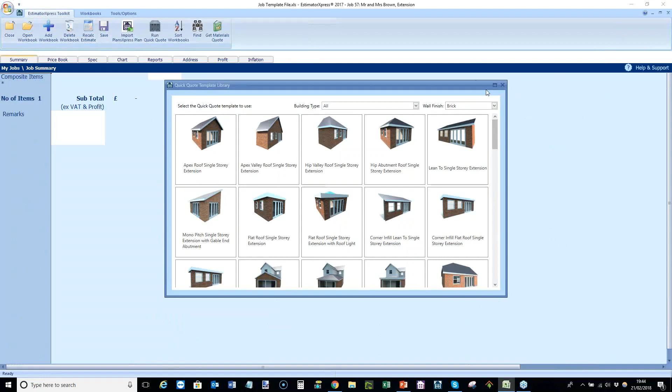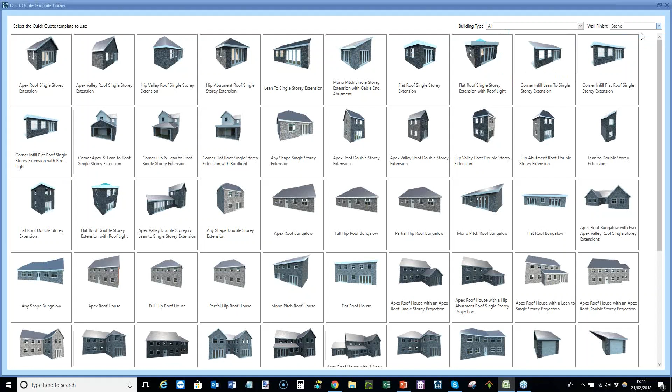Here we are in the template picker, and I'll expand this to fill the whole screen so you get an idea of how many different specs, types of extension and house there are. You can do it in render, you can do it in stone, literally hundreds of different extension types you can go for. I'm going to go back to a traditional brick and block extension, and we'll do something fairly straightforward - an apex double story extension. I could just as easily do any of the others; they all function in the same way.

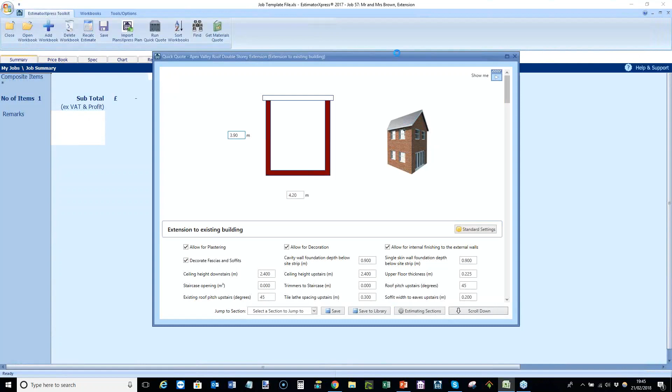Okay, so the software says, you've said you want to do a brick and block extension, I'm happy with that. These are all the things the software will automatically take account of and display on the screen if I so wish. I'm going to say yes, leave all those ticked, but if you want to, you could leave some out so you don't overwhelm yourself with information. Click OK, and the software creates the template ready for me to start inputting information.

So let's assume, for argument's sake, that my extension is projecting 4.2 meters, and let's assume that it's also 4.2 meters, so I'll leave that. It doesn't matter, I can change it to whatever value I like. I can confirm that I'm plastering, decorating, allowing for internal finishes to the wall where the extension adjoins the house. I want to finish that. I'm not going to decorate the fascias because I know by default I've got plastic fascias.

I can set my foundation depths, my ceiling heights, my floor thicknesses. If I was doing a house, I might have a staircase and trimmers. I can set the pitch of my roof, the pitch of the existing roof, and the pitch of my lath and my soffit width.

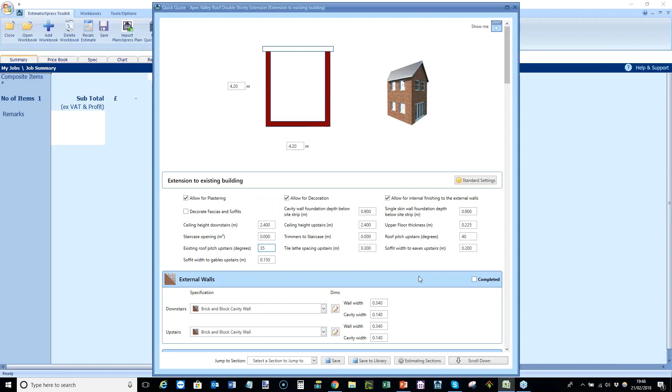So the system now knows all about the geometry. If I said to the system, prepare me an estimate now, what it would do is do the complete brick shell, slabs, upper floor and tile, but without any doors and windows, with a brick and block specification. Now clearly we're going to want to do doors and windows, so I'm going to show you how you do that. Incidentally, at this stage, even though I've initially said I want to do a brick and block, I could change the specification of the upstairs and downstairs walls to render or structurally insulated panels, ICF, and so on.

I can have a concrete ground bearing slab, or I could change that. So say I wanted to change that to a beam and block floor with a screed, pick that, and the system will automatically do that for me. I'm going to go for an uninsulated timber floor. I could change it if I wanted to.

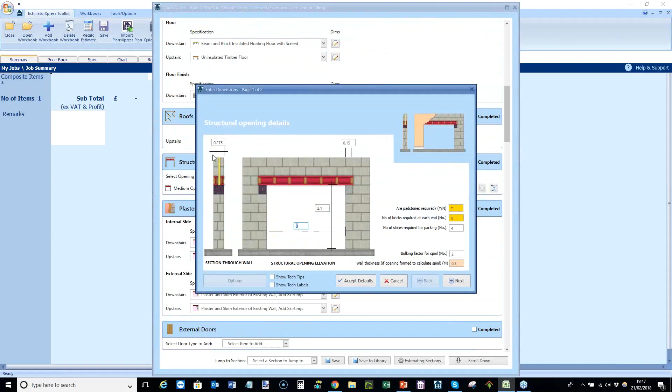I'm going to do a cut roof. I'm going to plaster and insulate the ceiling, and I'm going to have a structural opening upstairs and downstairs in this example. So I've got openings to existing walls, and I'm going to do a couple of openings that are 3 meters wide, set that to 3, set the height into the thickness of the walls, the end bearing, whether I want pad stones or bricks. I'm going to use pad stones, spoil bulking factor, whether I want to plaster the reveals and so on.

Click finish, and the software has automatically calculated that once I put in that I want one downstairs and one upstairs. If I wanted to, of course, I could have a structural opening downstairs and an internal door upstairs from the bedroom or whatever. It's entirely up to you.

The system will then allow me to automatically plaster the existing walls, and if you want, it will allow you to plaster the inside of the house and so on, because you may well be disturbing that when you bang a big hole in it. Obviously the software is going to take account of the structural opening in the wall.

I'm then going to add a patio door. Now I could use the crystal doors. There's several thousand doors to pick from there, but for speed I'm going to pick a bifold door from a standard range. So let's pick say a 3 meter bifold door for downstairs, and I want one of those.

I want some windows. Again, I could pick from the crystal windows, but for speed I'm going to pick a standard one. So a couple of those 312Cs, and I want one of those downstairs. Let's say a couple of those, one on the back and one on the side. I could add roof windows if I wanted to.

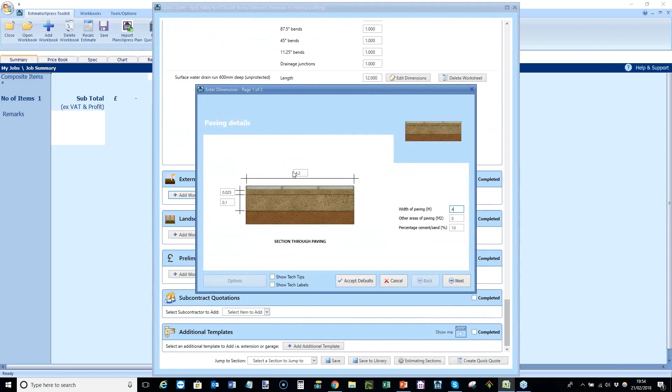On the external work side, you can add patios and so on. Define the size of your patio. Let's say it's the width of the actual job. Thickness of sand blinding and hardcore. And maybe it goes out 4 meters or so on. You can define what plant you need, spend a few minutes checking that out, press finish, and that's estimated that.

You can then add your prelims and sundries. Things like cleaning, scaffolding, site acquisition costs, cement mixers, all the things that you can think of. Spend 5 or 10 minutes running through that, and you're ready to rock and roll with your estimate.

Incidentally, if you're doing the same sort of job all the time, you can set up templates that have got these presets. So if you do lots of rear extensions, you can have these set up so that you can do all your prelims with a single click. So the software gets faster and faster, so eventually you're doing estimates in 10 minutes rather than half an hour.

Okay, so once we've done that, press Create Quick Quote, and the software will then build the estimate for you. It's going to go off there, it's going to get the geometry of the extension, work out all the surface areas, all the foundation depths, the volume of excavation that you've got to do, the amount of skips that you need.

Work out the area of beam and block floors, the screed on it. It's going to work out how many doors and windows you need. It's going to plaster the reveals, work out the angle beads around the windows, the seal around the windows, lintels that are required over them.

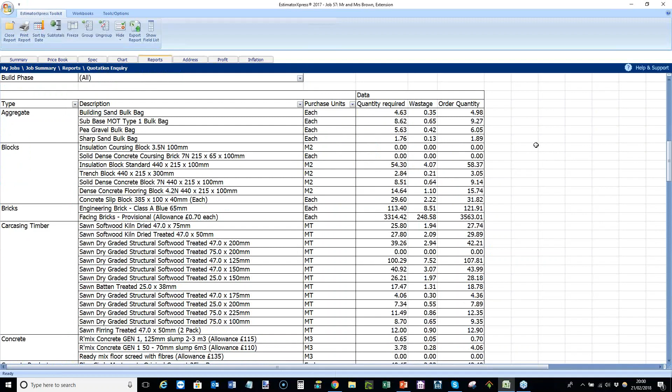Okay, so just to finish this, let's have a quick look at material schedules. So if I wanted to send a quotation enquiry off to my merchants, you can see here I've got a complete schedule of all the materials that I need, including wastage, so they can give me their best price for each item.

Again, all of that's just cascaded off the back of our template. And as I was saying earlier, you can merge this information together for numerous jobs so that you can get better prices across the board.

So let's now have a look at a quick quotation that you can provide for your client. I'm going to go into a customer quote by build phase. It's just reminding me that I haven't put the customer's name and address in there, but I am going to continue.

And it then says to me, okay, what sort of quote do you want to do? Well, you can give them quite a detailed quote by putting in the key resources. If you want to give them just a headline price, you can do that. So you can see it just says to build the foundations, there's the price. And in fact, some people use both techniques.

They will produce a detailed quote so that they can run through it with their client. But rather than leave the quote with them until they've signed the contract, they also do an abbreviated quote and say, now that you understand the job, here's an abbreviated quote. I'll leave it with you. If you've got any questions, come back to me.

Some people are fearful that once you've done all this work, they'll just dole the quote out for lots of other builders to price. And I'm sure it's a valid concern.

It wasn't one that I had particularly when I was doing it, because it was all about building the confidence in you. So by the time you went back to them, you'd given them a pretty good idea of what the price was likely to be because of experience and square meter costs. When you delivered the quote, it was really a confirmation that you knew what you were talking about. Here was the detail, and they were ready to sign.

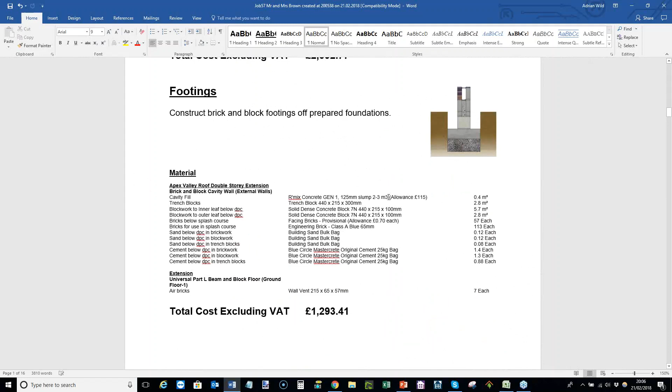Okay, so let's have a look here. Obviously, the customer's name and address isn't in there, which would appear on that page. If I scroll down here, you can see that the materials are all scheduled in detail. Because we asked for quantities, let's go back to the beginning of foundation, you can see the volume of concrete in the foundations and the cost for that phase. The beauty of providing the phase cost is that as soon as you've done that, you can start issuing invoices to make sure that you're being paid in a timely fashion.

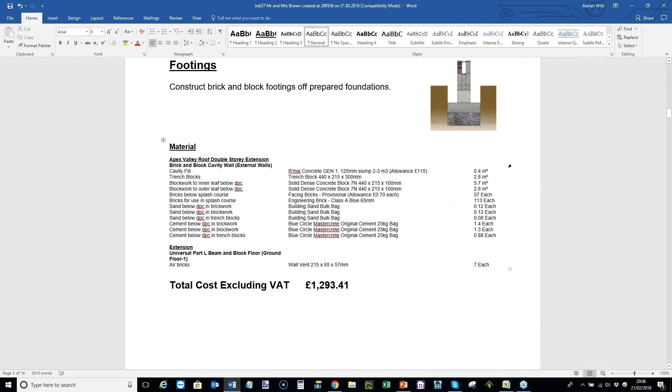All the materials are scheduled. Incidentally, the amount that's actually shown here is the quantity excluding wastage. You're not actually displaying the wastage as well. So if your client starts counting the number of bricks, that's going to be pretty close to what you'll get, even though we all know that there will be wastage. You can also see that we're in the brickwork shell, and it's starting to pull together the information relating to the different doors and window openings, dummy frames and so on have all been allowed for. There's the drainage, first floor joists and so on.

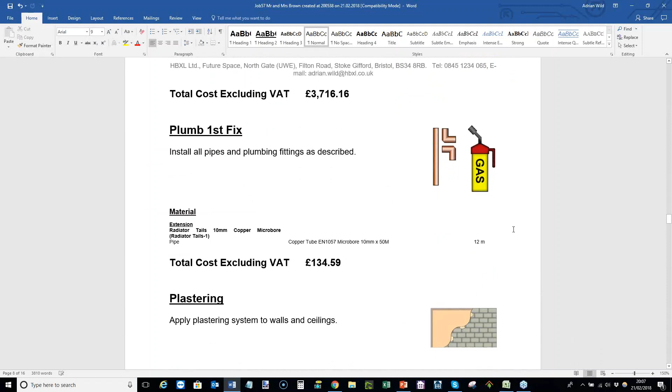All the information relating to the roof structure. There you can see we've got the valley boards all worked out, gutter angles, gutter clips, swan necks, all carefully calculated. There's the two steels going in, or sorry, they're two 3-meter openings, so you can see that with the end bearings you've got the 6.6 meters times 2. Roof tiling, electrical first fix, external works, joinery, plumbing first fix, plastering. We think the plastering is quite interesting because you can see that it's plastered the roof. There's the screed, the plastering to the structural openings, connecting wall plastering, reveals to windows and so on.

So all of the different surfaces are automatically picked up by the software. There's the electrical. You can see we've got all the sockets and so on for the different rooms. And so it goes on. So you can see if you look at the bottom left-hand corner here, you've got a 16-page detailed quote right the way down to the decoration. Finally, an overall figure there, VAT and so on.

So hopefully you can see that if you take a good quality quote, having spent the time with the client, your chances of winning the job are dramatically improved. And if you like, and I would say this, wouldn't I, the cost of the software pales into insignificance. You can up your margins quite comfortably to a sensible rate where you can build a sustainable business to support you and your family. So have a look at it. Call our support team, our sales team, and they will be able to give you further demonstrations and help you to purchase the software in a way that suits yourself.